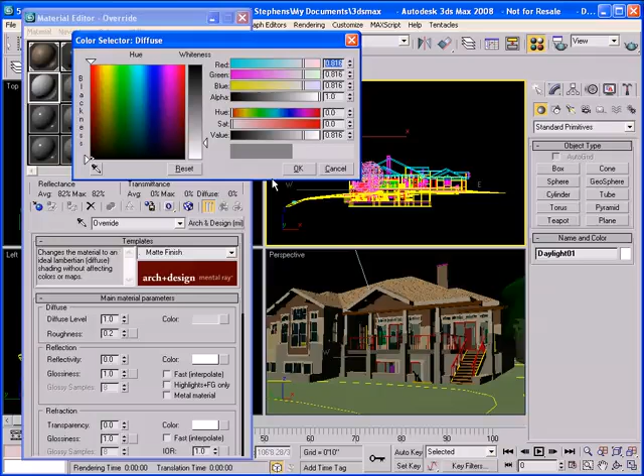I'm going to go into the material editor, click M, and find an empty slot. This is going to be my override material, so I'll rename it override. I'm going to create a material here that will replace the other materials in my scene. I'll go with a matte finish for the template since I don't want it glossy, and under the color swatch I'll change it so it's just a slight gray color. If it's too white, it'll be too bright. I'm just trying to create a nice contrast between the model and the shadows from the daylight system.

Now you can hit F10 or click the render scene icon, then go into the processing tab. Under processing, there's a material override section. Click on enable, and notice it says material with a box that says none. Just drag the override material I created in the material editor over that box and place it in there. Where it says instance, that's what I want, so hit OK.

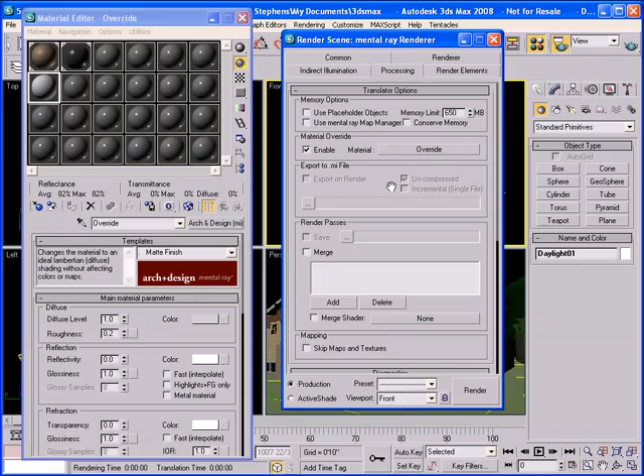Since that's an instance, I can make changes back in the material editor to that material and it'll update on the model. So when I render, it's going to render the same model with the same lighting, but replace all the materials with that override material.

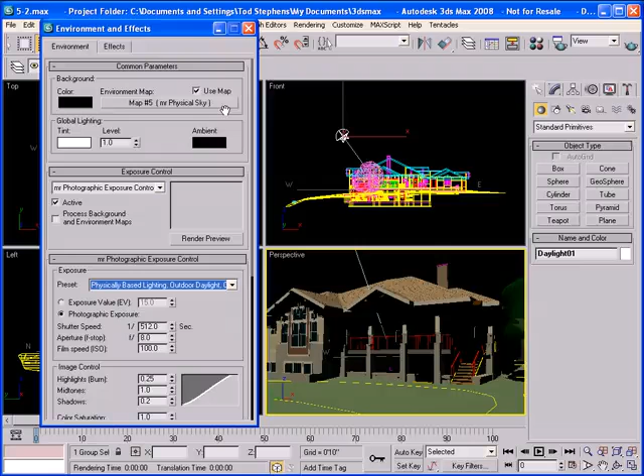I'm going to go into my environment settings. Since I have the MR physical sky on and my photographic exposure control set to that outdoor daylighting preset, all my lighting will work for my daylight system. I'll go under indirect illumination and keep final gather on with a draft setting and diffuse bounces of 2, then hit render.

All the settings we used in previous videos are the same. The only difference now is I have that override material on there. We're still going to get the sky color, and since we're using that MR physical sky, we'll actually get a different sky color depending on what time of day it is.

So when I do this light study, it's going to go from morning sky to afternoon sky to night sky. It's actually going to go completely dark at the end of the animation. But that override material gives it a nice contrast to the shadows. So I'm done with the material settings.

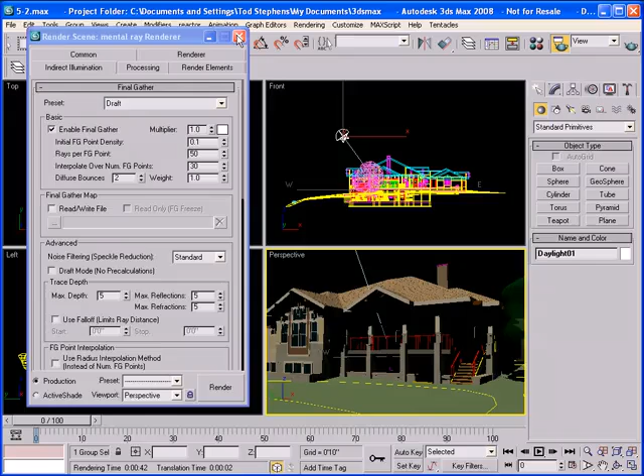Now I'm going to animate the daylight system. I click on the daylight system and go into the motion panel, which is the 4th tab on the control panel. It's the hours, the time, that I'm going to change over time here and animate.

On my slider at the bottom, notice it says 0/100 — that's frame 0 of my animation. I only have 100 frames by default, so I'm going to click the time configuration button in the lower right corner. On the end time, I'll create 300 frames, changing end time to 300 and hitting OK. That gives me 300 frames to work with.

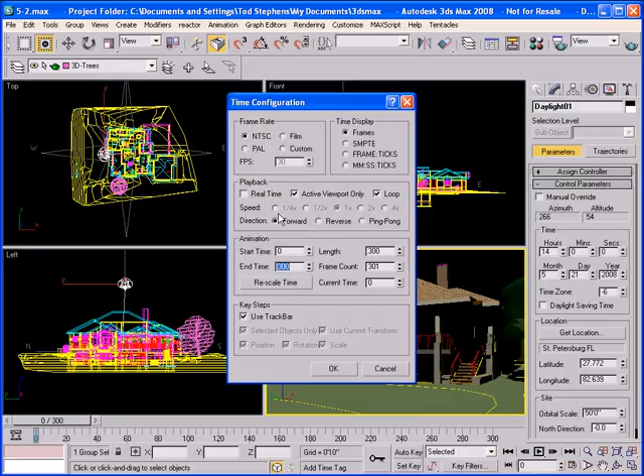We're using the NTSC standard, National Television Standard, so we'll be at 30 frames per second in our animation. This is going to be about a 10-second animation, so every 30 frames is 1 second of actual animation time.

At the start of my animation, I'm going to change the hours here to 06, so it's 6 a.m. My time slider, where it says 0/300, I need to make sure that's at 0. So I'm going to render that at 6 a.m. to see what it looks like.

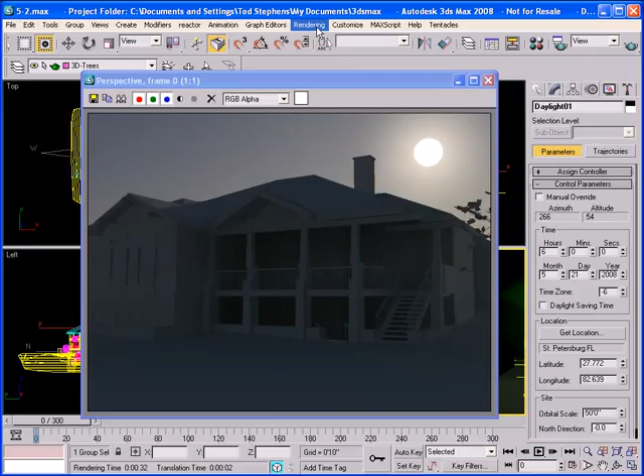Again, my override material is on there. It's 6 a.m., so it's the morning sun, and it's very dark. It has that orange color to it. Notice the sun is actually out there — that's part of the MR physical sky parameter I set under the environment settings.

That MR physical sky does just that — it creates the sun there. So you have to make sure your daylight system is actually in the view you're rendering, and that sun is going to rise up out of the scene when we animate it. So I'm going to start at 6 a.m.

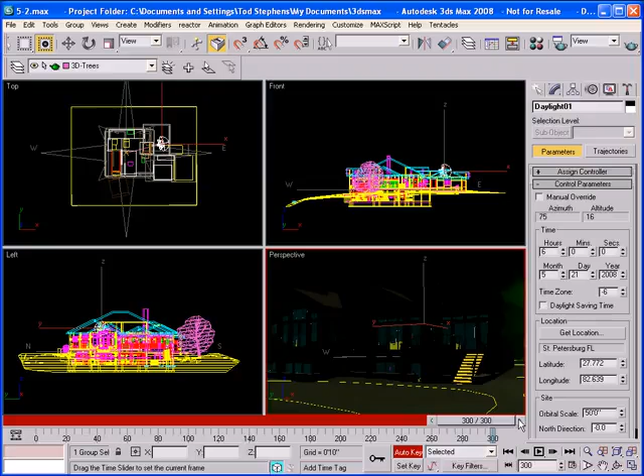Now I'm going to turn the auto key button on at the bottom. Max is going to memorize any movements I make here over time. So I'll take my time slider and scrub it to frame 300 — this is going to be the end of my animation. At the end, they want it to be late at night, so I'm going to set it to 20 hours, so it's 8 p.m.

I can still get a preview in the perspective view, though it's probably going to render pretty dark. But notice those little keyframes that appeared there.

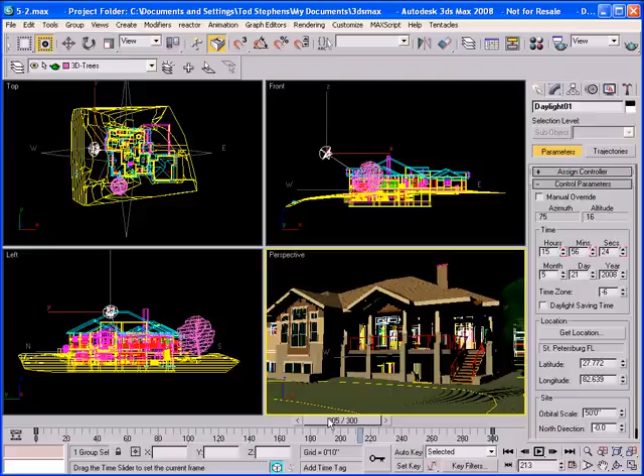I'm going to turn auto key off. If I move that slider back and forth, I can see now that my daylight system is animated over time and the shadows are changing. So I've just created my light study there, and all that's really left is to render this out now.

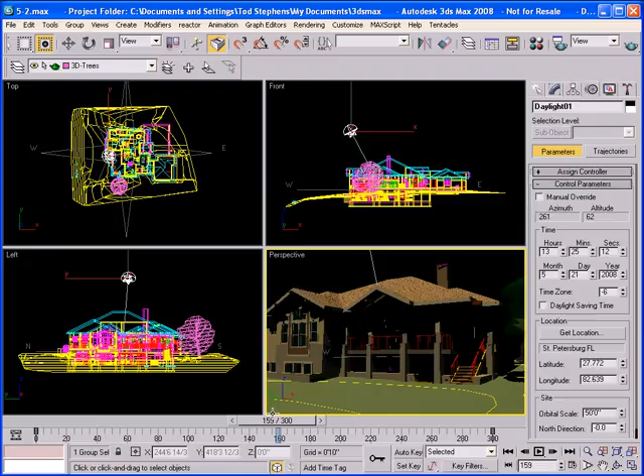And you can see the changes in shadows. I'm just going to turn play on. It's kind of like VCR controls, lower right corner. I just clicked on play, and whatever view you're in, you can see over time how that's changing. So moving that time scrubber around allows you to look at different frames of time.

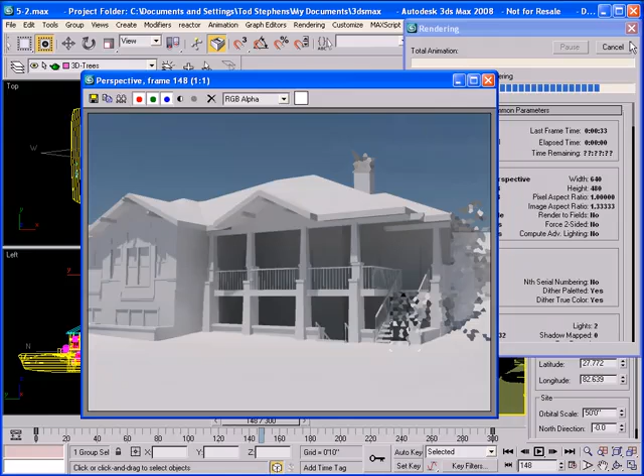So I'm going to go about frame 150, about in the middle of the animation. We looked at the morning sun before. Now we're in the afternoon, so the sky has changed to that bright blue. Sun's no longer in the view. So over time in our animation here, that sky color is going to change to give it a nice realistic look.

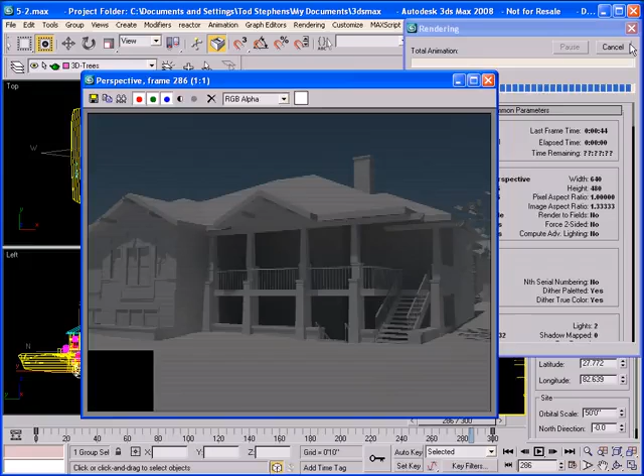I always do some test renders in between my beginning and end of the animation just to make sure it looks good. And as I get closer to the end here, my perspective view is pretty dark there, the preview. When I go to render, pretty late at night, so it's going to be extremely dark. So you get to the point at the end of this animation, it's going to be just really complete darkness. You can just barely see the building there.

And in our next video, we're going to actually add some light inside the building, so you can have some lights that turn on in the interior of the building. So that's something we're going to end up adding. But for now, we're just going to keep it this way.

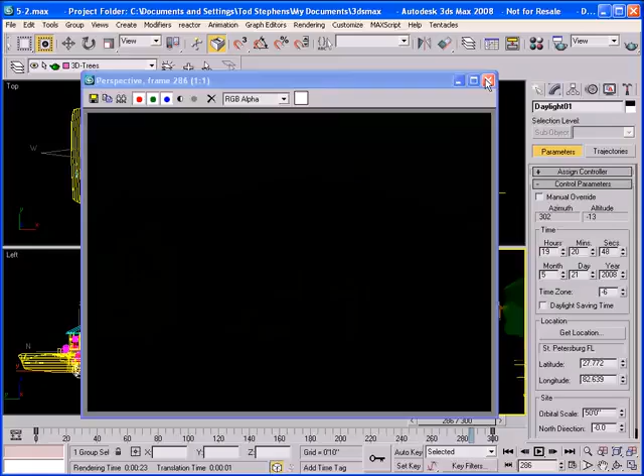Now to render out this animation file, that's all created, ready to go. We just want to render it now. If I go into my graph editors and track view, the curve editor—this is again something we're going to use in future videos—track editor shows the curves of whatever object is selected. Right now solar time is selected, so for that daylight system, that's just the change in value from frame 0 up to frame 300.

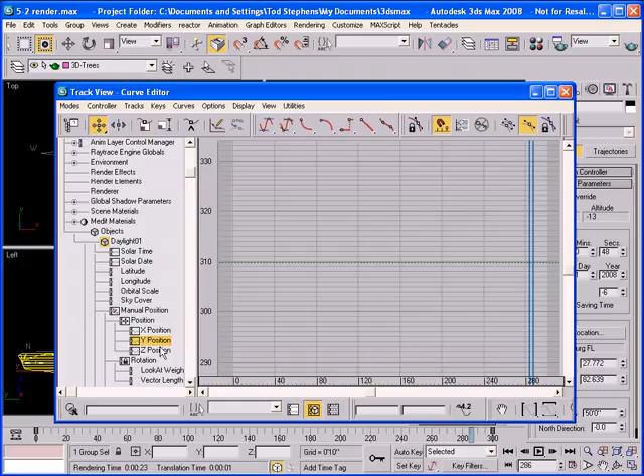Other settings right now don't have any curves because I didn't change any of the other settings basically. As we work through other objects, we'll be working with interior lights, and we'll be making some changes in here. So right now for this daylight system, the solar time is the only curve being shown. It's showing my keyframes. On the left side, it's showing what time of day it is, from 6 a.m. up to 8 p.m. It's just a straight linear change.

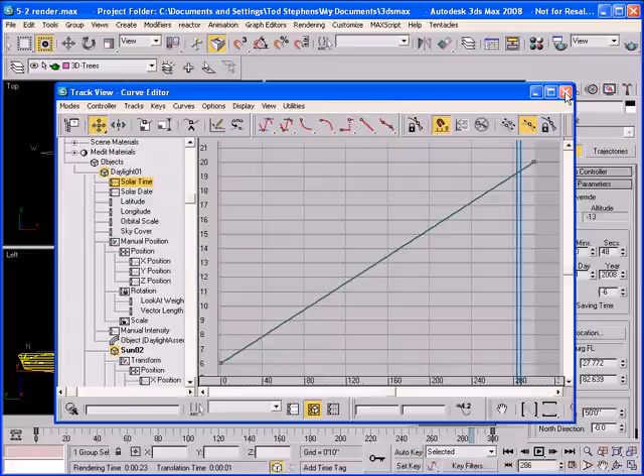This relationship could be changed if we wanted to, directly from the curve editor. So this is just a way to change your keyframes, and we're going to revisit that in future videos. That was just to introduce you to the curve editor.

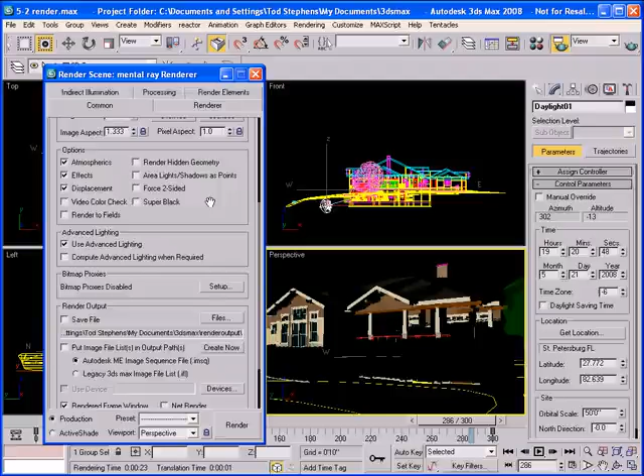Now to render out this animation, I'm going to just click on F10, or click on the icon in the upper right there. Active time segment, so I'm under my common tab here. My active time segment, I'm going 0 to 300. The pixel width and height, I'm going to change to 320 by 240 to make it a smaller video, just so it'll render faster. Then I'm just left clicking and panning up to get to my render output setting.

So under render output, I'm hitting Files, and you just want to navigate out to where you want to save the file. I'm just going to give it a name, light study. File type, we'll go for an AVI. That way Windows Media Player can play it. You can also do QuickTime movies. So for AVI, you're just going to click on Save.

So all 300 frames now are going to be rendered out as an animation file. Video compressor, we'll use Cinepak. You can see all the other listings that are in here. You have to compress the video, otherwise it just won't run smoothly. You'll be dropping frames if you don't render it with a compressor.

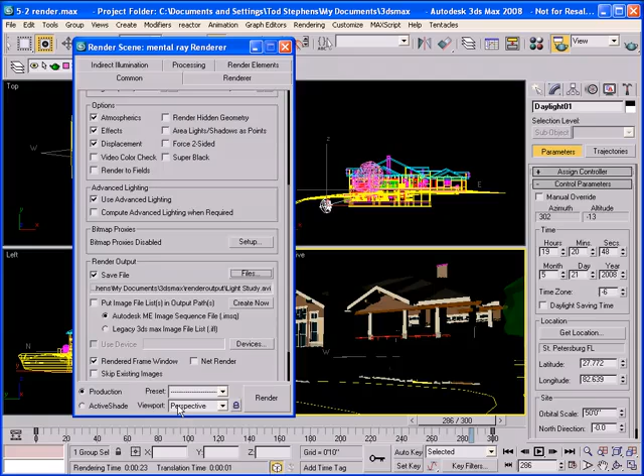Check my viewport—it's definitely the perspective view down here. And I'm going to click on render. So now every one of those frames has to be rendered. It's going to start at frame 0 and just render them out. So you just let Max render this video out. At the end of the 300 frames, the animation will be complete.

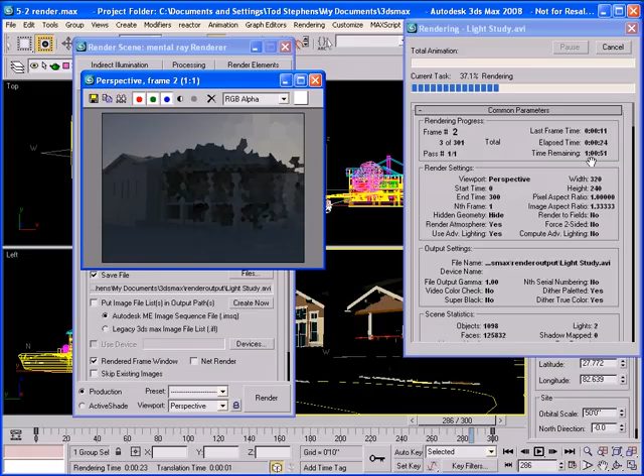And then you would just open up this AVI file we're creating here in Windows Media Player and play the animation. So this is going to keep going. Notice here it's telling me I have an hour under time remaining, so it gives you an idea of how long it'll take to render. That's actually pretty fast—using that override material, turning on or off some of the other settings could make it go faster, but really that override material is what's making it go pretty quick now.

If you have a large pixel width and height, it can take a long time to render. So just let that render out, and then you can open up that AVI file and test it out yourself there.